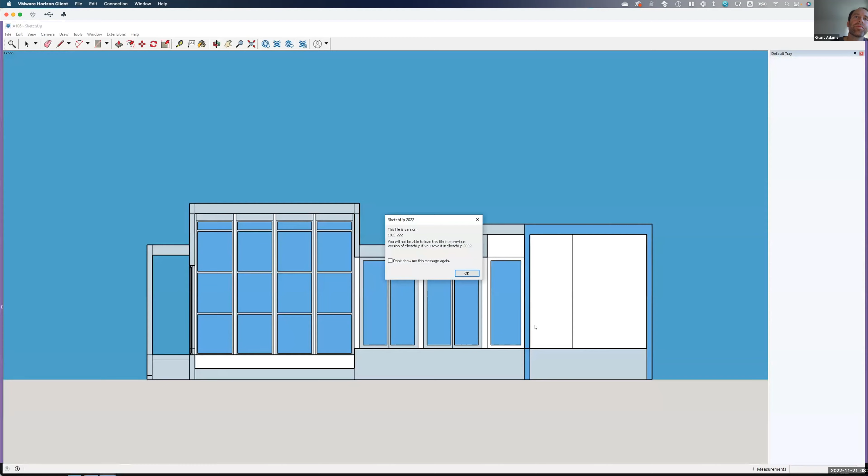Perfect. Let me switch into a perspective view so we can see my drawing, or my model. So this is the model. You guys have seen this house before. This was the one I brought in and worked on last class.

What we want to do is set up an elevation view. You're only doing one today, but the key is that even if we align it like this, you can see it's still in perspective—we can still see that little diagonal line. It's not really an elevation view, nor is this view an elevation view.

In order to get an elevation view, we need to switch out of perspective. The easiest strategy is to go up to the camera menu, go to standard views, and start with one of the side views. Let's look at the front, for example. Well, that's not the one I want.

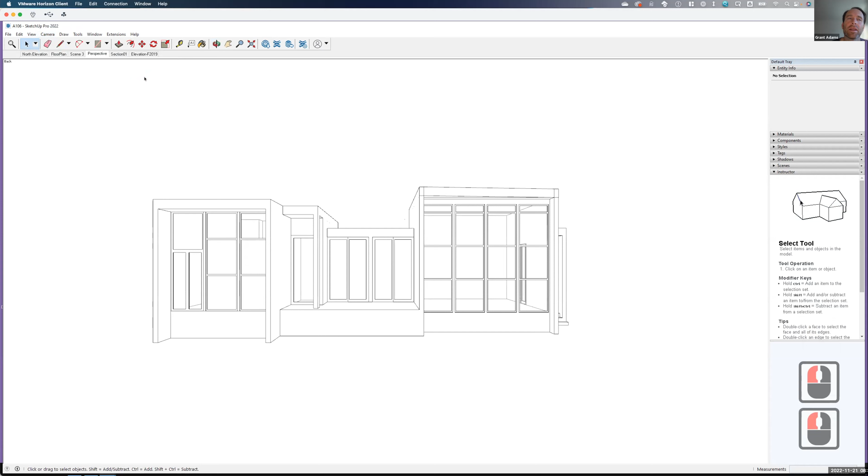So let's go back to standard views. Let's go to the back. Looks like that's how I have it oriented. So that's good, but it's still in that perspective.

Now let's go up to the camera, and instead of choosing perspective, we're going to choose parallel projection. When we do that, we see that the perspective goes away, and that's what we want. This is fundamentally an elevation view.

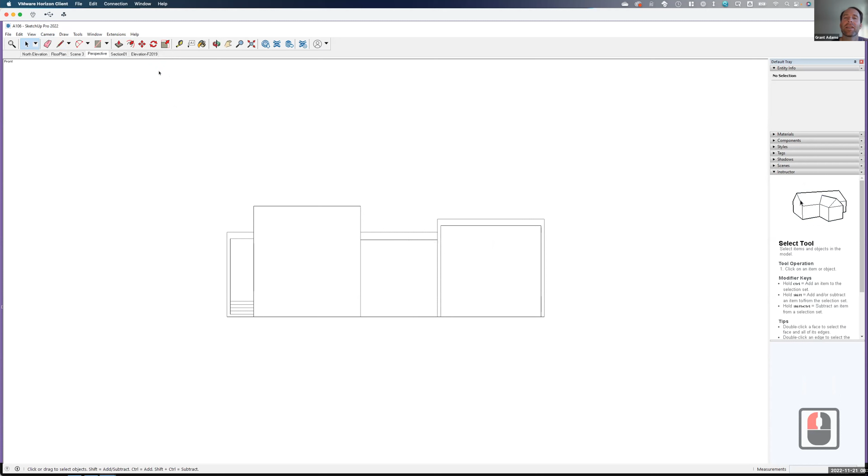Now, do I have other elevation views? Absolutely. Are they complete? No. If I went, for example, to the front view, that's less than exciting. Could I work with this? Sure, if I had to, but I don't want to.

So pick the view that looks best to you. For me, it happens to be the back view—that's the most complete, and that's the one I'm going to work with. If you're working through this, do something similar: pick the view that's most complete.

Then I'm going to zoom in on the view a little bit, just so we can see more of the elevation. So maybe right about like that.

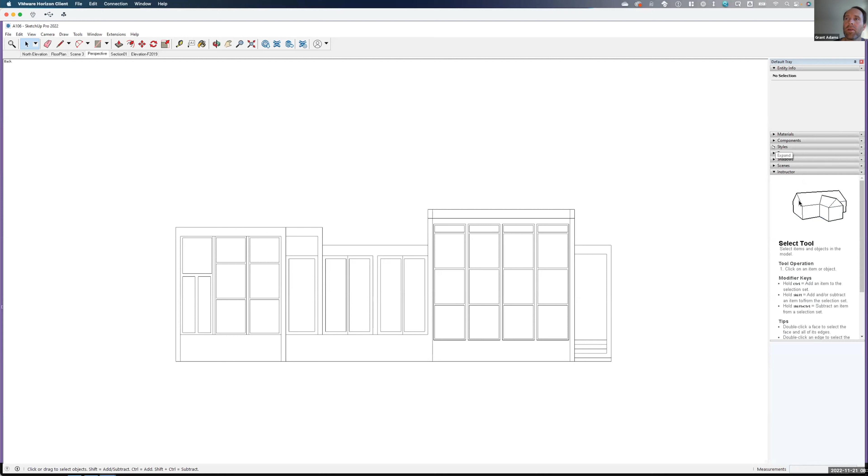Now that I have the view showing here, it's nice to be able to save this so I can come back to it later. We do this in Rhino all the time—oops, sorry, wrong tray here—but we're going to do this in SketchUp as well.

I'm going to expand the little tray for scenes. If you don't have this tray showing up, go into Window, and under Default Tray, make sure Scenes is checked so you can get it if it's missing.

I already have a bunch of saved scenes here, but this is a new saved scene. I'm going to click the plus sign right here, and it's going to add a scene. It's called Scene 7 right now.

I'm going to go ahead and rename that scene. Let me scroll down here a little bit. Usually it gives me some properties. Go ahead and double click on it to see if I can rename it—you right click, rename scene. There we go. I'm going to call this Fall of 2022, and we'll call this Elevation.

Oops. There we go. And so that's going to save my scene.

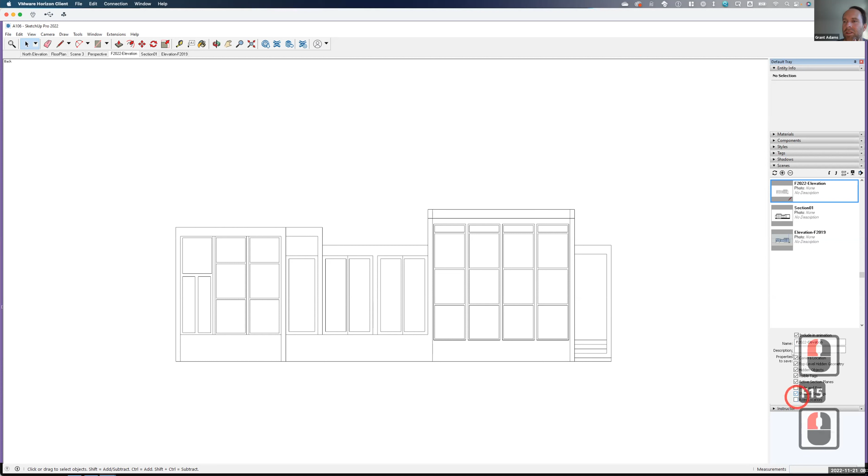Notice it says properties to save: camera location, top level, hidden geometry, hidden objects, blah blah blah. The only thing we don't really care about saving is the style, because we're going to be modifying that. We can also uncheck the axes location because we don't need those saved. Okay, so that now has that.

The advantage here is that if I were to go back to a perspective view, for example, and orbit around my object to look at it, I can come back to that fall elevation just by double clicking on it, and it's going to drop me right back into that view.

And this is good because if we make a change, we can go back and repeat the process and fix it and get this view again. So now that I have this view set up, it's a matter of exporting this into a place where we can do some collage work on it. We're going to be doing our primary collage work today in Photoshop.

So all I need to do is export JPEGs of this. This is just the basic lines drawing. I'm going to start by exporting this one. I'll go to File and then Export, and we'll choose 2D Graphic. So File, Export, 2D Graphic.

We're going to save it as a JPEG image, but I want to make sure it goes on my OneDrive here.

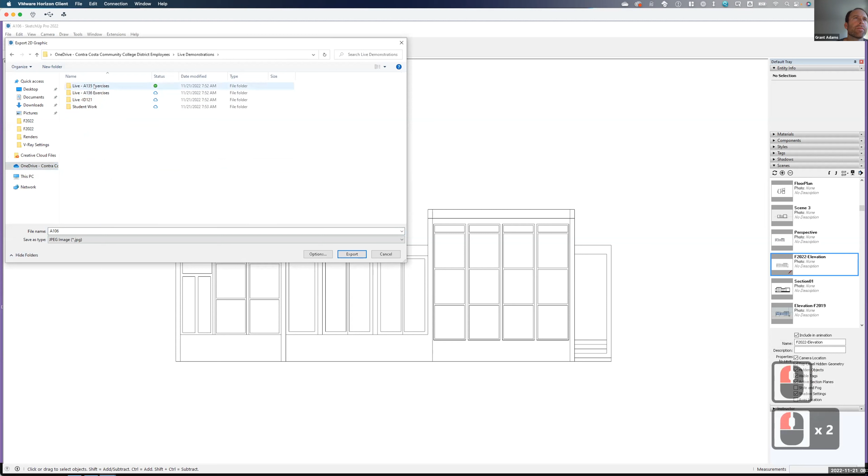When you're creating the scene, is it getting updated live or is it a snapshot? So if I were to make a change to the model and go back to that scene, it will show the updated change. So all that we're saving is the view itself. I could add something on top of my building and it would just come back to this view and reflect it. So it's not static in time, the view is just the saved part. Did that help clarify? Yeah, that's what I wanted to know.

Okay, so I'm going to call this A106, and I'm going to call it elevation, and dash lines. This is again for my own organizational strategy. And I'm going to look at the options here before I click on export.

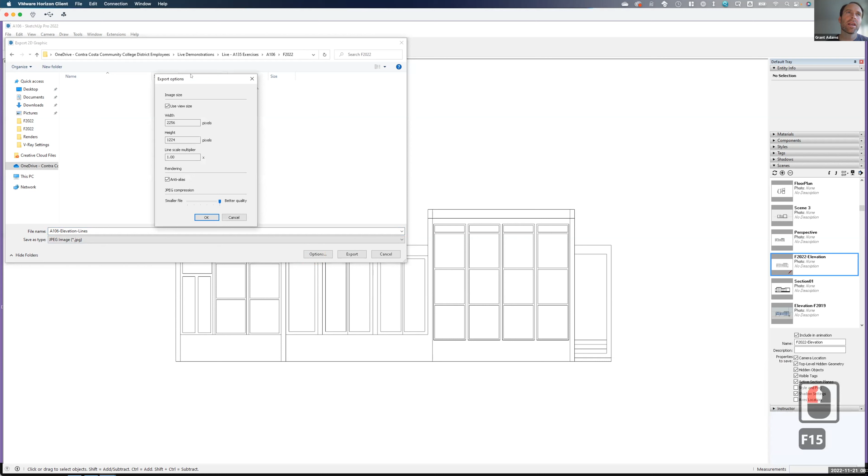This is actually really important because by default it's going to export the view size, which is only about 1,000 pixels tall, 2,000 pixels wide — really, really small. If you want to create this on a poster or something that's going to go up on the wall, you want to think about what size this should be based on how big it's going to end up being.

For example, if you wanted the width to be 10 inches on the wall — like an 8.5 by 11 piece of paper, but using 10 inches because it's a round number — we'd print it out at 300 pixels per inch, or 300 dots per inch. So we'd be looking at about 3,000 pixels in width for 10 inches. If we wanted it at 20 inches at 300 pixels per inch, we'd be up in the 6,000 range.

So when doing these exports, you want to think about how big you might want to make it. I'm going to call it 6,000 for right now. I'll uncheck the view size and change this to 6,000, and you see the height also updates. So we're having it at 6,000, and we're going to use our better quality, all the way to the slider.

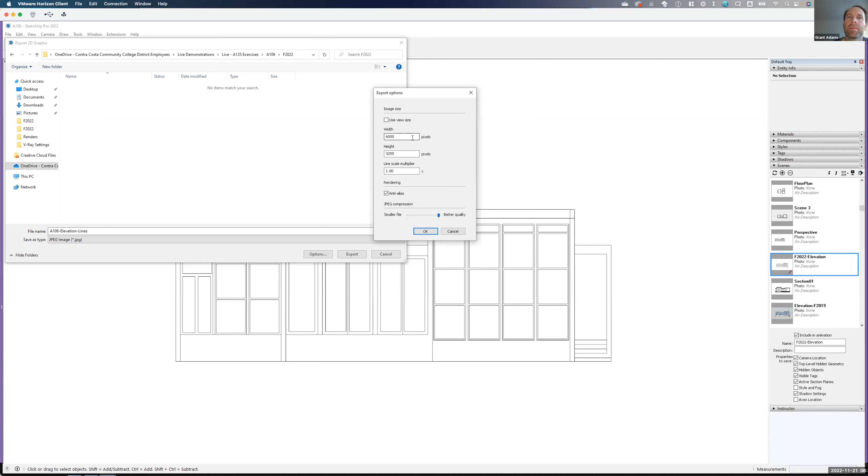The max you can put in here, I believe, is 10,000 or 9,999 — I think that's the max SketchUp will export. So I'm going to use 6,000 for right now, that's enough, and we'll go ahead and say okay, and then click export. And that exports just my basic lines version.

Now some of you have probably experimented enough with SketchUp to note that there are different styles available for us as well. The line version I'm showing is the hidden line style. You may not have been in this style — you may have been looking at something different to start with. There's nothing wrong with that, or one of these other styles, but we wanted to get it into the lines-only version. So I go to the default styles and choose the hidden line style, and that's just our white lines.

Likewise, if we go into our — I think it's under assorted styles. No.

You could go into straight lines here and use one of those. I don't like those as much. I really like the hidden line style. I think that's the best one. But once I'm on that, I want to make sure I turn off all these extra lines.

So I'd go into view and I'd turn off the axes, the guides, so that I end up with just this line. That was the original export, and I should have gone through the process of getting it set up that way. Now, sometimes you do actually like the colored version.

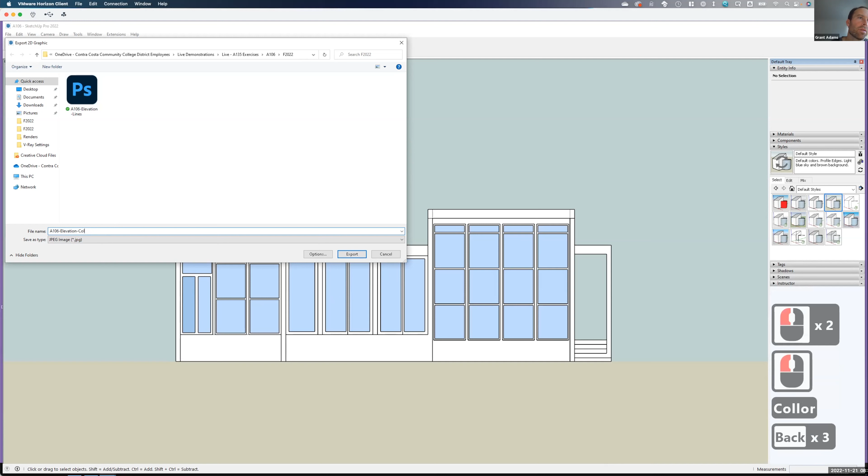Under our options here, we're going to make sure it's still set at 6,000, which it is. And then we'll go ahead and export it. It's important that we haven't moved the scene at all, so we're getting the exact same view exported and the pixels match up. So we're still at 6,000.

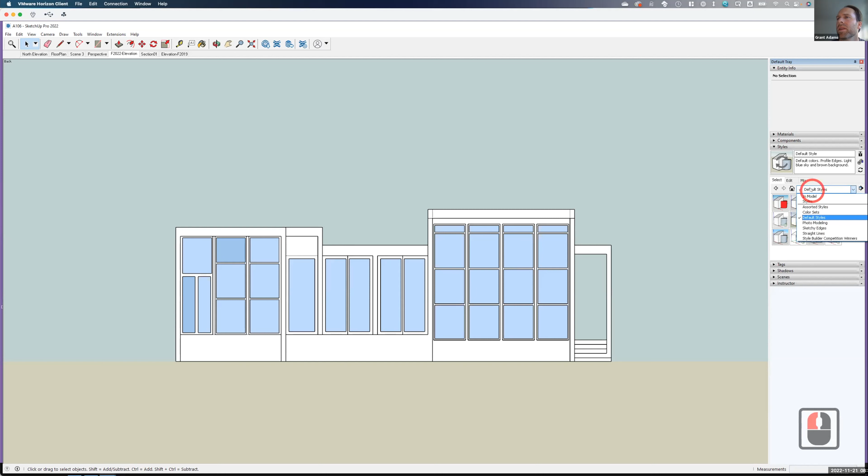Okay, so let's look at some of the other styles. I'm going to go back to that hidden line style. And this time I'm going to turn on the shadows. So I've gone to hidden lines and I'm going to go up to view and I'm going to turn on shadows. And then over here in the shadow section, I'm going to swing the time of day and time of year until I get a shadow.

Now, in this scenario, I don't get the best shadows because I'm on the face of the building. That's not going to give me the best shadows, but maybe something like that might give me a little bit. There we go. Now I'm starting to get a shadow on the building. So maybe somewhere in there.

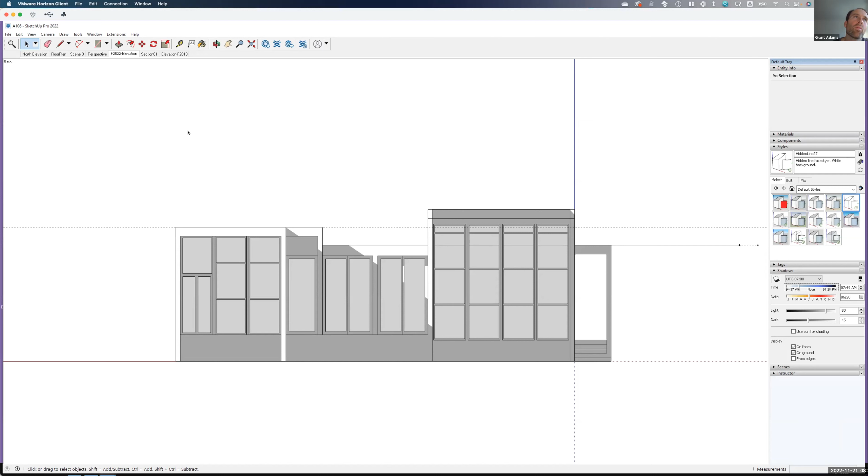Obviously, you can pick a day and a time. Let's do that. Okay. You can pick a date and a particular time, and that's going to create the shadow for you. Once again, I'm going to go to, yep.

Did you geolocate this? I did not geolocate this. So we can geolocate it. For the scope of what we're doing in this class, we don't need to. If we did, we'd go to File, Geolocation, and Add Location, and it would then give us our bit of terrain, and we could set this on that piece of terrain.

So if you want to do that, this is assuming just a generic date and time. But if you wanted to do it, I can certainly help you walk through that part of the process. Okay, we can do that during check-in. But it's a little bit beyond the scope of what we need to do right now.

All right, so now that I have the shadows here, what I don't want to see is all of my building lines. So I'm going to go back into my styles here, and I'm going to go to Edit. And when I'm in Edit, I can actually turn off the edges. It's right there under Edit, it's the first little edge settings, and I can uncheck the edges, and that gives me just the shadows.

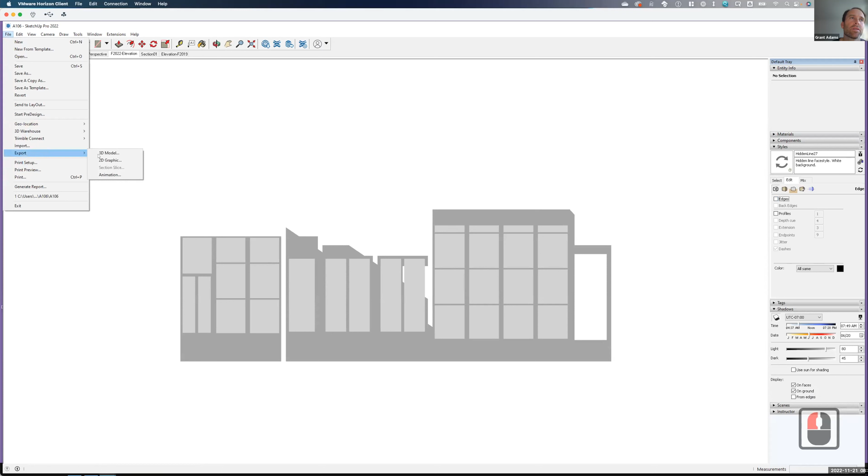And this is a very powerful export to have because it's only the shadows in my building. I can then go back to File and then Export 2D Graphic. And so this one would be called Shadows. And then we'll go ahead and export it.

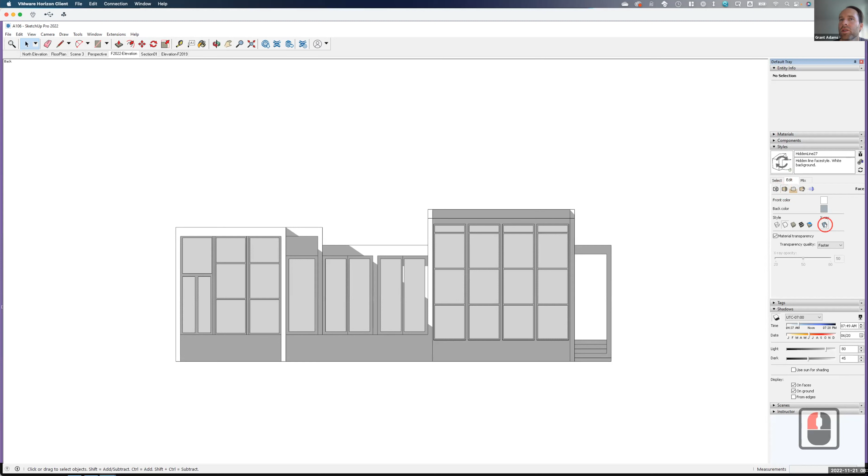Let's turn those edges back on. We can also come over here into our face settings, and we could choose to do an X-ray mode. You can see a little bit of my door in the X-ray mode. The truth is that in this view, there's not a whole lot to see in X-ray mode. So it is one of the options, one of the things that I mentioned in the tutorial that I walked through. But I don't think in my case, X-ray gives me anything. So I'm not going to end up doing the X-ray mode.

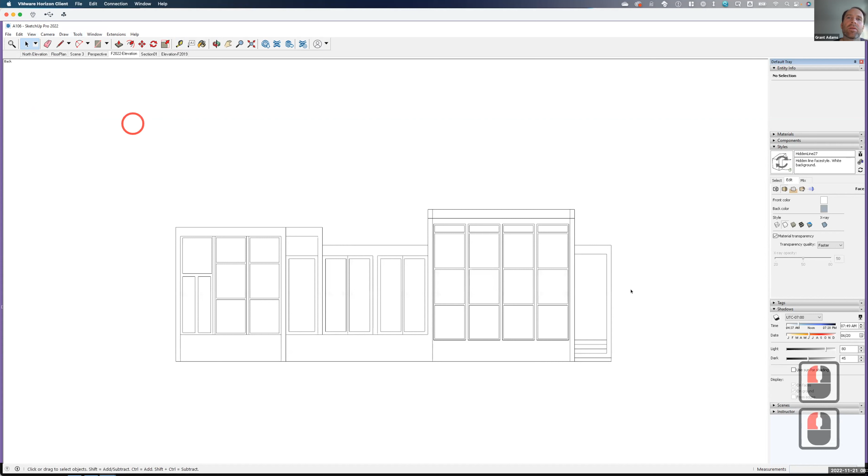Let's go ahead and turn back off those shadows. I'm going to go into my view, and I'm going to uncheck shadows. And then let's look at some of the other styles. So we worked with that hidden line style. There are some other ones like these sketchy edges that can sometimes provide a nice kind of look.

Sometimes they're a little bit too much. Let's see if we can do it. Something like that is probably a little bit too much. They have different dry erase markers and whatever. I've actually found a lot of luck in the past with this airbrush with endpoints. It doesn't look the best here, but in the export, it sometimes looks really, really nice.

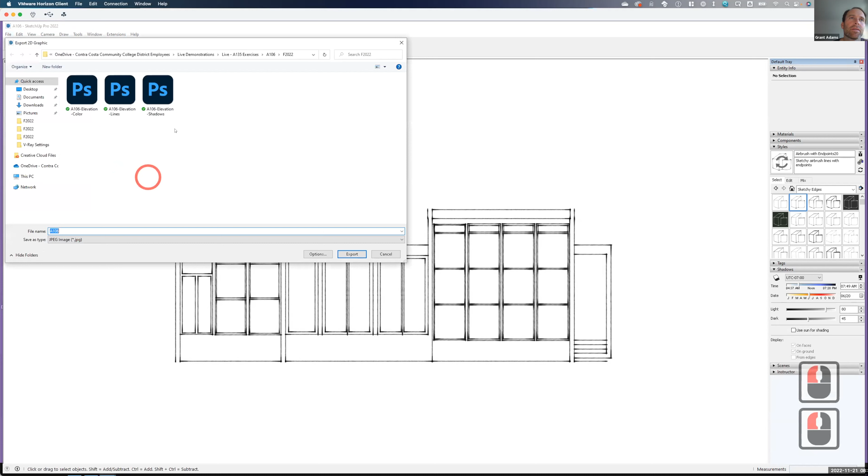So I'm going to go ahead and click on that airbrush with endpoints. And once again, I'll go up to View, and I'm going to turn off the section planes, the section cuts, the section fill, and the guides. So I have just the airbrush with the endpoints. And from here, I'll go ahead and export it again. So I'll go to File and then Export 2D Graphic. And we'll call this one Airbrush. And we'll go ahead and export that.

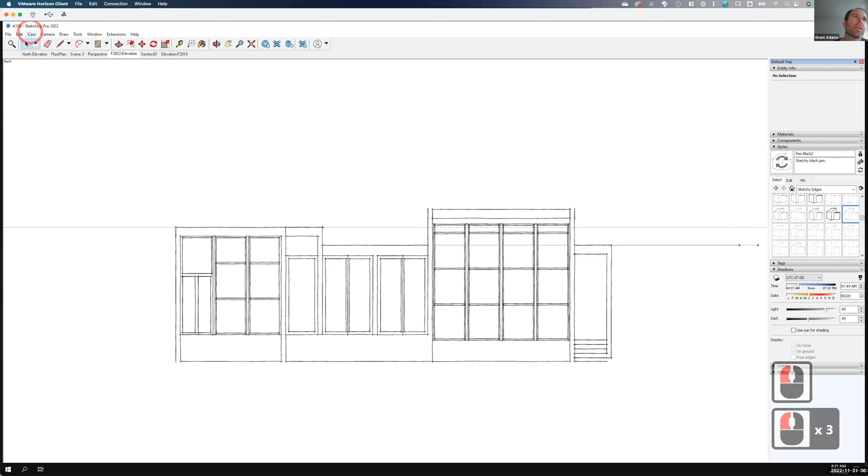And the last one that I've had good success with is the pen gray, which is this one. It's a little bit lighter. There is a pen black, I think. There's pen black. It's just a little bit darker. I like the pen gray, but again, it's just a matter of preference. I'm going to go ahead and go to View, and then we're going to uncheck the section planes, the section cuts, the section fills, and the guides.

And this is a little bit more casual, and we'll go ahead and go to File and then Export 2D Graphic. If you want to experiment with any of the other options, this is the pen, you can absolutely export any of the other options here. So if you liked, for example, let's see here, they have some of these.

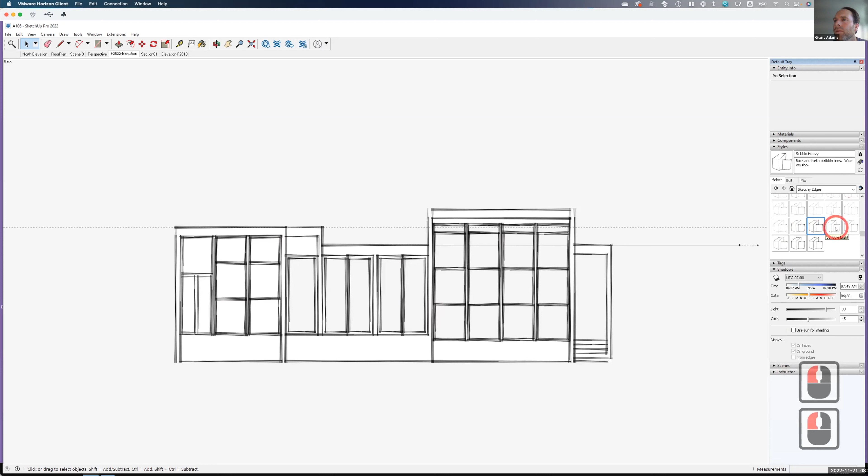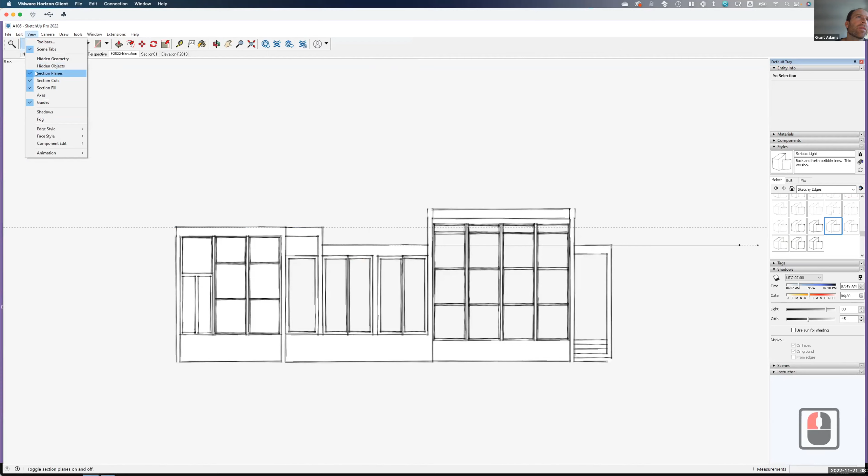Let's say you like that. We could export this as well. I'll go to File and then Export and then 2D Graphic. And this one was called Scribble. So I set up the pen, the airbrush, the shadows, the basic lines. I set all of those up for you to do some of the export. Oh, before I did that, I should have turned off the section planes, section cuts, and the guides. Let's do that export again.

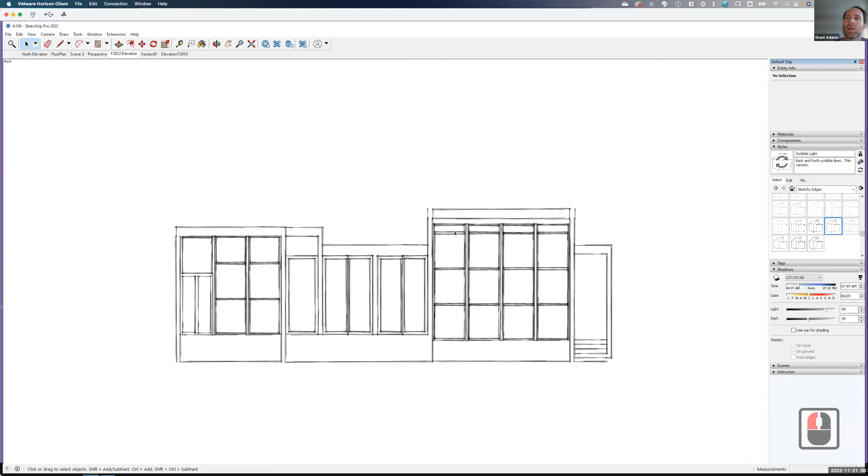So I've set up those 4 as kind of the base that you need. But if you want to go in and do more, there's no harm in doing more of these exports because you can layer them up and see what it looks like for you when you start to put them together in Photoshop. So I've done the exports. Now let's jump over into Photoshop and start to collage these pieces together. So I'm going to go up to the Adobe folder here, and we'll open up Photoshop 2022.

And one of the important things to consider when we're looking at this is that this is not a scale drawing. This is a representation of what one of our elevations would look like. If we wanted it to be a scale drawing, we'd have to do some scaling of it when we went to print it, say in InDesign. So this is a little bit different than when we took AutoCAD into Illustrator and we did the collage work. There we were preserving scale. Here we're just creating an image of our elevation view.

So I'm going to go ahead and open the first one. So I'll go to Open. And let's go into my folder here. That was not the correct folder. Sorry about that. All right. And so here were all of mine. I'm going to go ahead and click on the elevation lines, and we'll go ahead and open that. And there's that base lines layer. So this is currently a background layer.

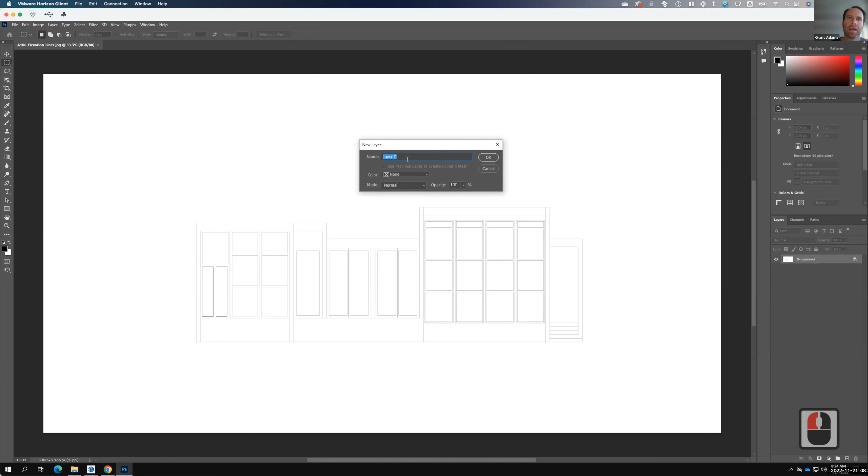Remember, in Photoshop, when we open a file, it always comes in as a locked layer. I'm going to go ahead and right click on it and say layer from background. There we go. And we'll call this lines. I'll say OK. Then I'm going to bring in all the rest of the elevation views. And I'll do that by going to File and then Place. And we'll use Place Embedded for this. And we'll pick the next one.

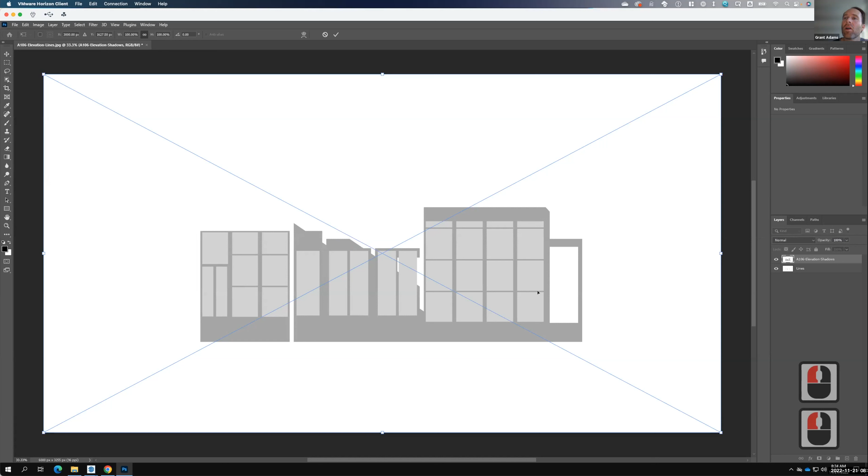So there's the lines. Let's do the shadows. And I'll place. And the advantage here is that they all line up when I bring them in. That's why the export process was so important. Let's bring in the next one. I'll go to File and then Place Embedded. And there it is. We'll confirm. And then we'll go to File and then Place Embedded. And we'll drop the color one in. We'll confirm. We'll go to File, Place Embedded.

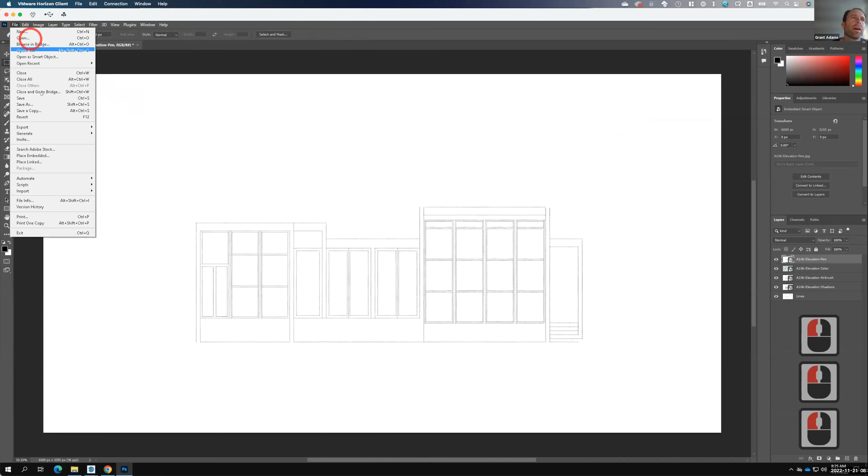We did the pen. Oh no, we need the pen. There we go. And we'll go to File, Place Embedded. And the last one was that scribble. And we'll confirm. Notice that the lines do look a little bit different in Photoshop than they do in SketchUp.

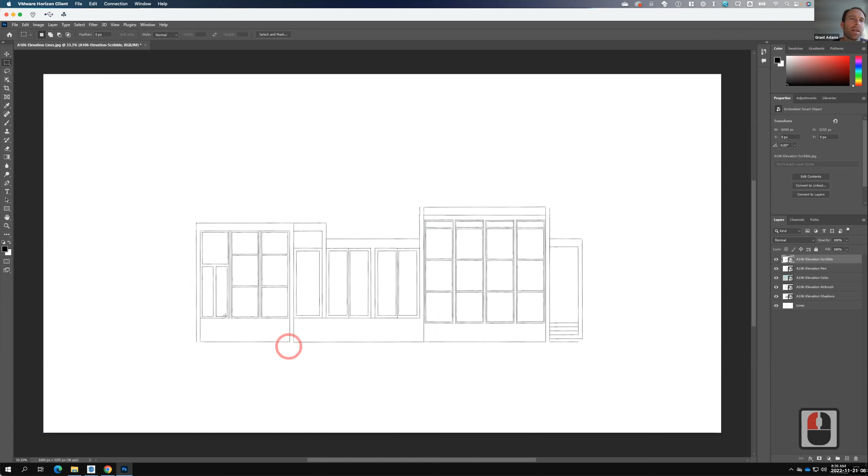This was the scribble in SketchUp. And then when we jump over into Photoshop, it looks slightly different. Now, if we were to zoom in, we can see that there still are some scribbles to it, but it's not quite the same. So I have all of those put in. And if you remember back, we had a strategy for how these things start to layer up.

So what I would do is I would take this elevation shadows and I would switch the blending mode. This is way back to 105. It's all coming full circle. And I would use the multiply blending mode. I can find it right there. And that's going to make this shadows transparent such that we can see our lines behind.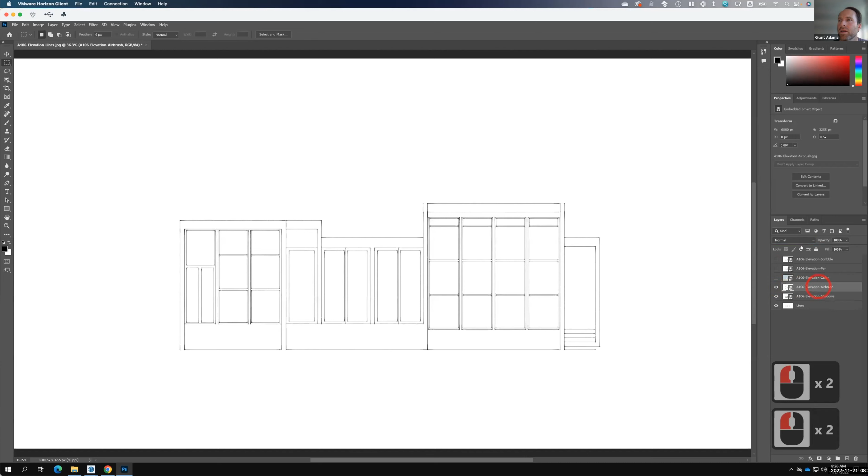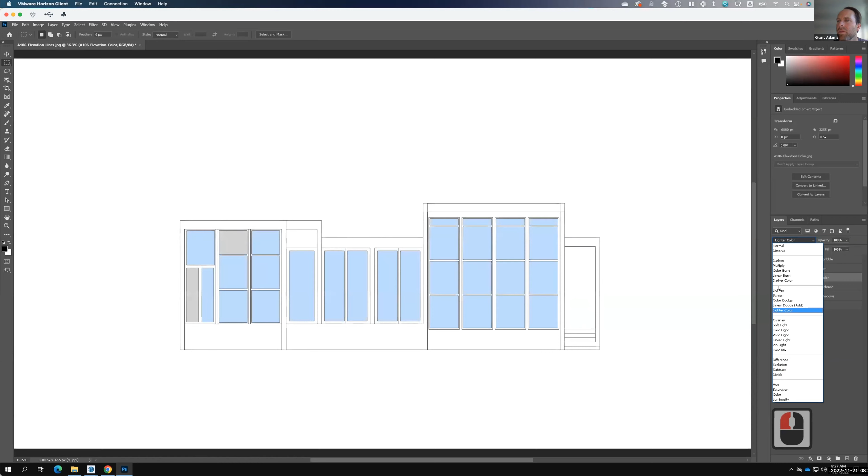Then we could turn on the airbrush and we will again switch the blending mode into multiply, if I can see it. There it is right there. Then we could turn on the color and we could switch the color to multiply as well. The color I'm not going to end up leaving on. Really, the color is just about selections, but we can go ahead and switch it to multiply just so we can see through it right now. And then I'll go ahead and turn it off.

Let me turn on the pen and we'll switch that one into multiply. There we go. And then this last one, which is scribble, we'll go ahead and turn that one into multiply as well. So our end result here in Photoshop looks a lot different than what we could have gotten out of SketchUp just by layering these up. There's a certain depth and density to it that we wouldn't otherwise have, which I think ends up being nice.

The other thing is we have the ability to adjust. If the shadows are too dark right now, we can easily change the opacity down on those shadows and make them lighter if we want more of our building to appear. So we've got a lot of flexibility in terms of how these start to come together and make our final building elevation. So now we've got our building elevation in here.

We need to concentrate on creating some ground. And this is kind of a critical component to a building elevation, is we need to know where that ground would be. So I'm going to create that ground on a new layer. So I'm going to go ahead and click on layer right here, and I'm going to rename that layer to be ground.

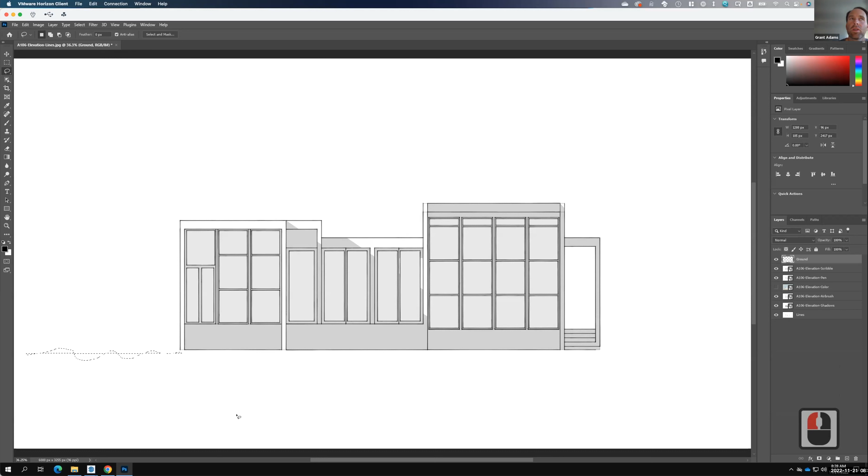And so to start to establish that ground, I'm going to make a selection, and I'll use this lasso tool to make the selection. The advantage of the lasso tool is I have the flexibility to actually draw what the ground would look like. So I'm going to go ahead and do that along the length of my drawing. I want to make sure, I'm going to press Control minus, that I can see the edges of my page. And then I'm going to start to draw what the ground should look like. So we'll go right about like that.

If you feel like you're running out of space with your mouse, you can always come back and go around, and then that'll enclose that area. Then you can come back and add by holding down the Shift key. You can keep going with a new selection.

I was just curious with the multiply command. Does that actually just sort of make each scene one block sort of? So what the multiply command is, it's the blending mode on that layer. So it's controlling how the transparency occurs on that layer. And what the multiply blending mode does is it makes things that are white transparent, and it makes things that are dark darker. So it lets the darker shine through.

And so in our exports, the background was always white. So using the multiply basically makes the background, the white, become transparent so we can see through it to the layer below. Oh, okay. Thanks. No problem. I'm going to go ahead and hold down Shift. Yep. It makes the dark darker, but there wasn't anything other than that layer that brought in the darkness. I don't understand. Yes.

So what it does, yes, it makes the darks darker if we were looking at a photograph. But when we're looking at this, the only thing that we have that's dark are the lines and the shadows themselves. So those are all darker than what is white. Therefore, those show up through the transparency.

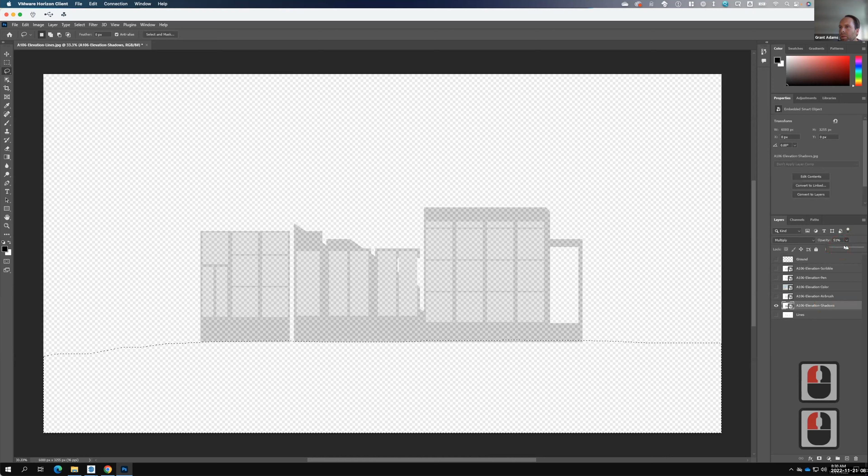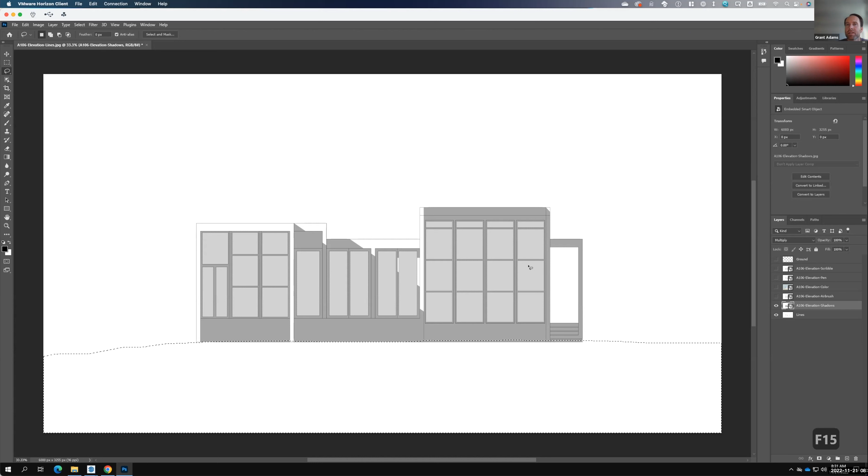And it might be easier to see if I turned this back to the opacity, right? So there we are with our opacity at 100%. When it switches to multiply, the white areas become transparent and the black shadows show through. So there it is with the lines on it. Okay, so the shadows become darker in a photograph, but in this they just appear. They just appear, exactly. Because this is a line drawing that we've created versus a photograph.

Okay. And so the colored version here may be a good example as well, because we're seeing the color in the multiply, but any area in this, let me turn these off for just a second, any area that's white stays transparent. So the colors are now appearing in the background when I turn this one on, oops, wrong one, sorry, but the white areas are staying transparent. Not that it really matters because they're white, but that's the idea of the blending mode.

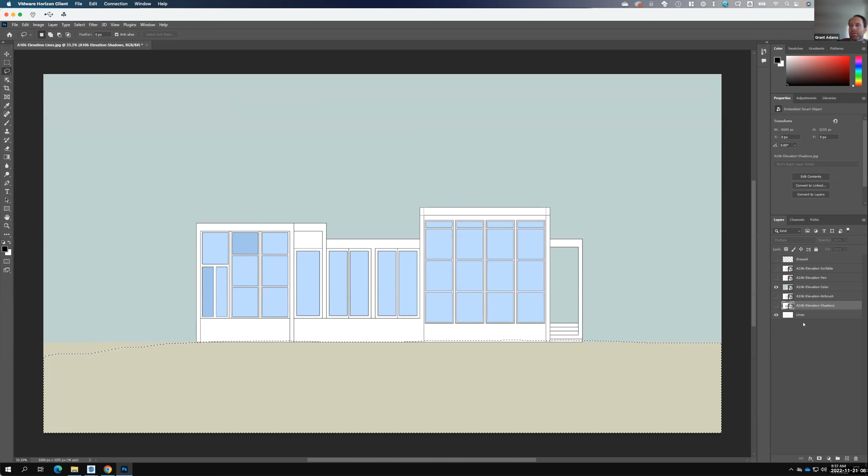It saves us from having to cut out the shape. Oh, okay. That's the advantage. We could instead cut out the shape, but by switching to the multiply blending mode, we don't have to. Let me change those shadows down. They're too dark. So I'm dropping the shadows down so they're not quite so dark.

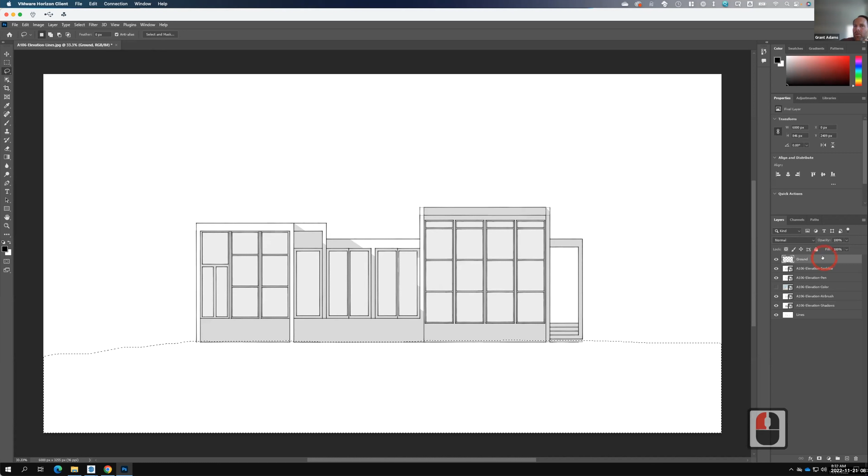Okay. So I went ahead with that regular lasso tool and I drew in the ground. And it looks like I missed the building just there a little bit. Let me go back to my lasso tool. I'm going to hold down Shift to add to the selection, and we'll come in here right like that. The key is that I want to make sure that I'm completely covering the bottom of the building.

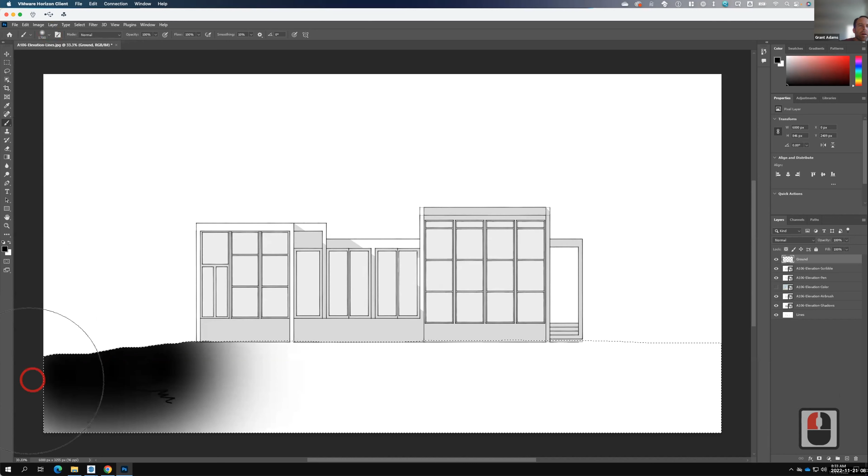Okay, so let me switch so that I'm on the ground layer, and then I'm going to actually paint using the paintbrush here with black. I'm going to paint in this area that I just made the selection. It would take me forever to paint like that, so I'll make my brush size bigger. I'm using the bracket key to make it nice and big. Alternatively, I could come up to the brushes and just slide the slider up. And again, the advantage of making it big is that I can fill this in rather quickly.

Perfect. So I've filled that in. That then gives me ground. This takes the place of that dark ground line that we were showing on the elevation view in AutoCAD. So we're giving us a nice ground. To me, this is still showing up a little bit plain. And so instead of leaving it like this, I'd love to add a little bit of grass on it. And I think that would look really nice.

I'm going to use the clone stamp tool. And we did this way back in exercise 107 or 8. I think it was 108. And I'm going to use the grass brush for this. It's not loaded by default, so we're going to load up the legacy brushes. There it is. And then we'll look under our legacy brushes, under the default brushes, and it's about halfway down. And there it is. There's my grass brush.

So again, I'm using the clone stamp and I'm using the grass brush. And when I pick that grass brush, I need to copy from. So I'm going to hold down the Alt key to choose where to copy from. Right there. And then when I go to create the grass, I'm going to add the grass right along that edge. This looks to be about the right length.

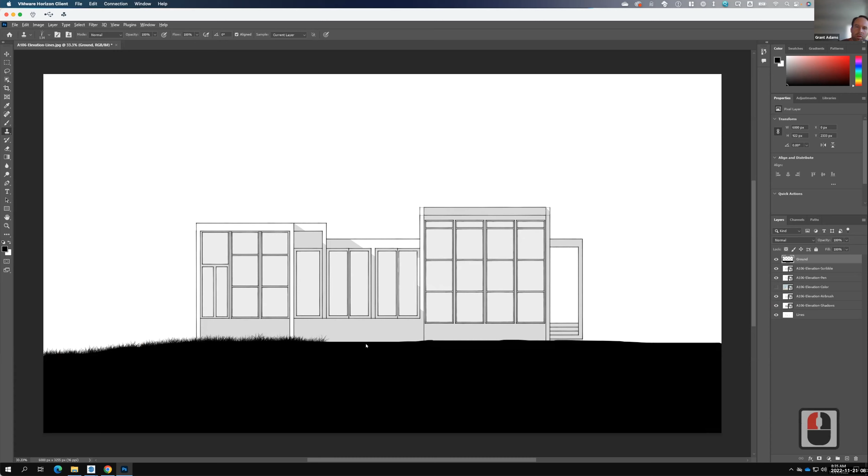All right, I'm going to press Control Plus to zoom in here. Oops, that was Option Plus, not Control Plus. I'll use Spacebar to pan. It helps if I actually hold down Spacebar. There we go. And then we'll keep cruising along here, and filling in that grass.

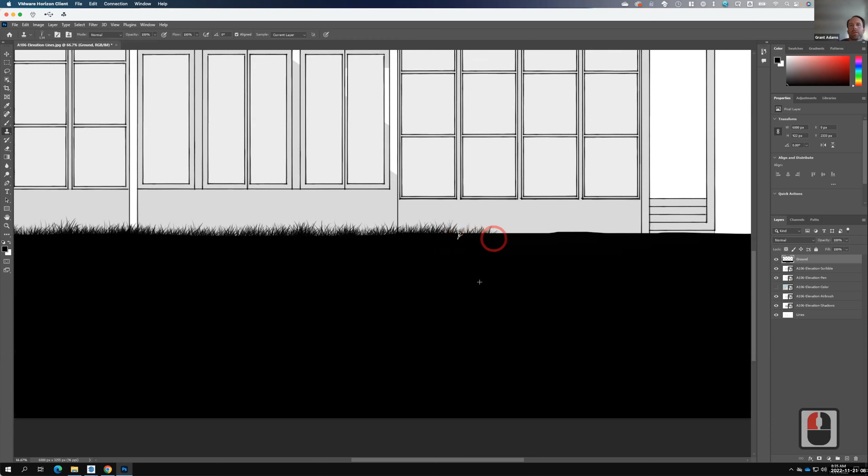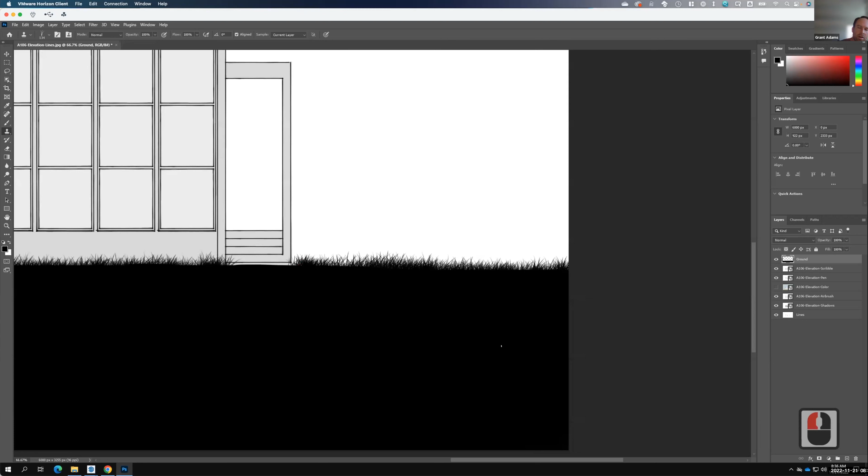I'm going to stop right there at the path, presuming that there would be a path there. And then I'll move myself over to the other side, and I'll pick up where I left off. All right. And now I have that grass. So if we look at it as a whole, I'll press Control 0. There we go.

Instead of having this sit just floating in space or having a dark line below it, what I've done is I've added some ground to give it context. And you can already see this starts to live. It starts to ground this building and give it the context of a particular scene. So I've added that little piece in.

Now, if you really don't like the black, we can make modifications to that. We can put an adjustment layer on the ground. With a levels adjustment, we can skew it to be like a gray or a white or whatever. So I'll show you some options a little bit later on if the black is too stark for you. There's no harm in fixing that.

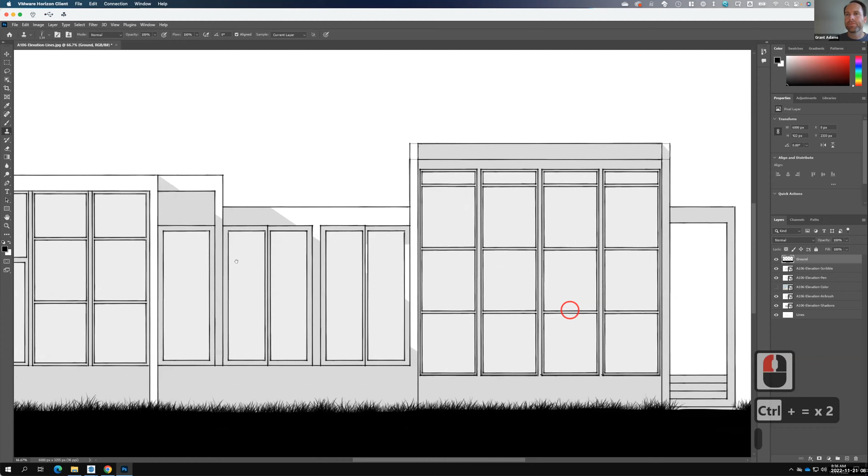The other thing that you might find, if I zoom in here, is that maybe that path should be a little bit more straight where I'm walking in. So we could use a rectangle here and fill that in so that it became a little bit more path-like. Let me use the paintbrush here and we can just fill that in like that, as if it were a path that somebody was walking on. Let me press Control-0 to zoom out, and there we are.

So thus far, I have my elevation, I have my ground. Now let's start thinking about how we could collage in some context for this. This is always kind of like when we were in Illustrator after AutoCAD, we're deciding how much is too much, how much is enough, what do we want it to look like, what shows well. So I'm going to start with a background, and the first thing I need to do is find a background image.

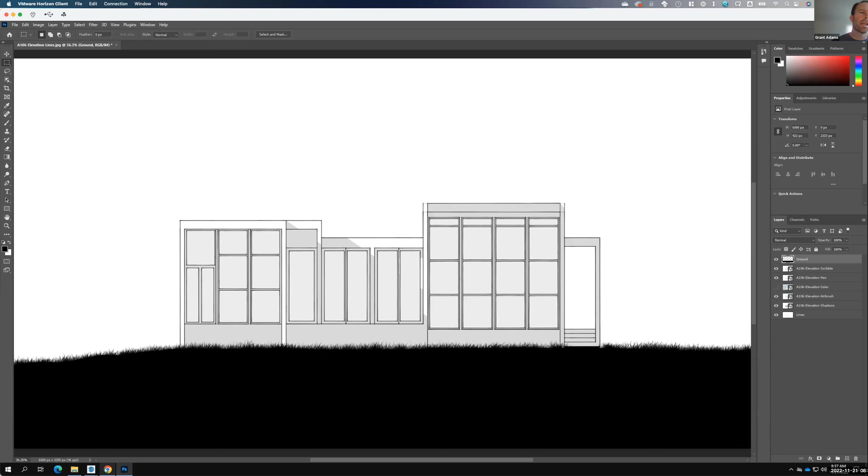I'm going to click on the new tab here, and we'll go to Google Images. Actually, I'm going to do a Creative Commons search. So let's search.creativecommons.org. There we go. I'm going to look up Yosemite Meadow. Perfect. Any one of these images might work really nicely to give me some background context. This one, for example, that's a little bit low. Maybe this one. Yeah, I like this one.

Let's see if we can get the image. Perfect. Let's go ahead and download that. I'll click the little download icon, and I want to download it in its original size. Ooh, that's not a very good resolution. Remember, we were at 6,000, so 1,600 isn't very good. I might go back and see if we can find a better one. Yeah, that's better. And we'll download this.

Obviously, if we were going to the site to do a site visit, we'd have our own picture of exactly what the site would look like. So sometimes you take potluck here, and we're going based on what we can find. That one might be okay. I'm not overly concerned with sunlight settings because we're not trying to match up my particular scene. So any one of these would work out okay. We'll try that one that I just downloaded.

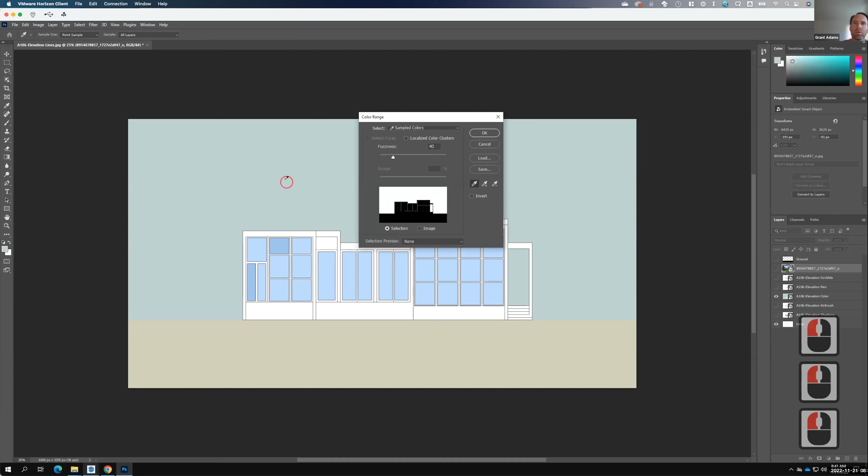So we need to mask off where our building would be. So to create that mask, I'm going to go all the way back to my original layer right here. Sometimes people like to use the color version here because this can really help, because you could do a color selection. So I could go to Select and then Color Range, and I could choose everything that is in this blue color really easily. So that's just a strategy.

I'm going to go ahead and select that, but I'm also going to select down here. So I'm going to use the magic wand tool right here. I'm going to hold down Shift and select that as, whoops, I need to be on the color. There we go. So now I've selected that. So I made sure that the transparent parts were selected and the background selected.

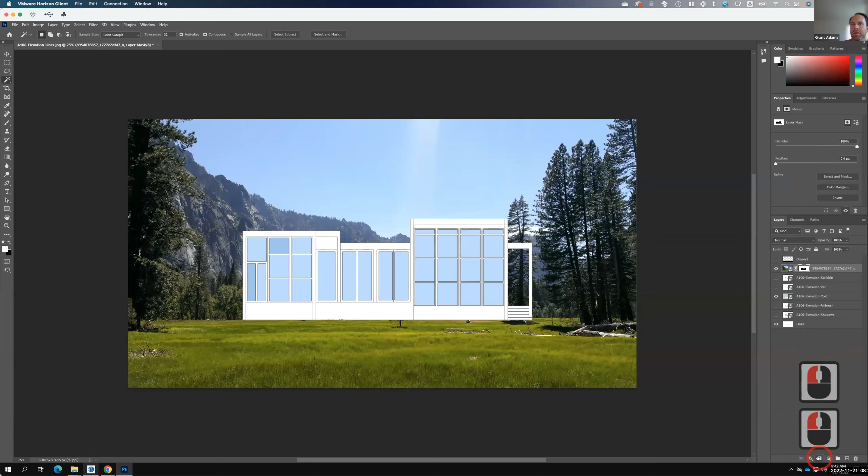Then I can come up onto my photograph right here, and I can click on the add layer mask. And that's going to cut out for my building. We turn back off the color, turn back on the ground, and we can turn on the rest of these like that. And now we're starting to see my building in its context.

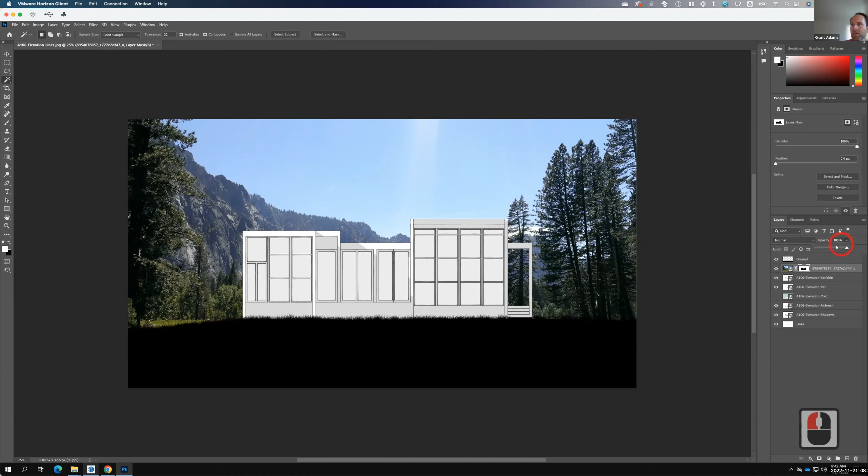This context is still a little bit stark for me, so I might do some modifications to it. One, I might adjust the opacity down to let my drawing read some more. Maybe I'll convert this background image into black and white. Maybe that would look better. So this is, again, an example where in Photoshop, you try things to see what looks right. So I'm going to go ahead and add an adjustment layer. I'm going to go up to Layer, New Adjustment Layer, and I'm going to do a Channel Mixer.

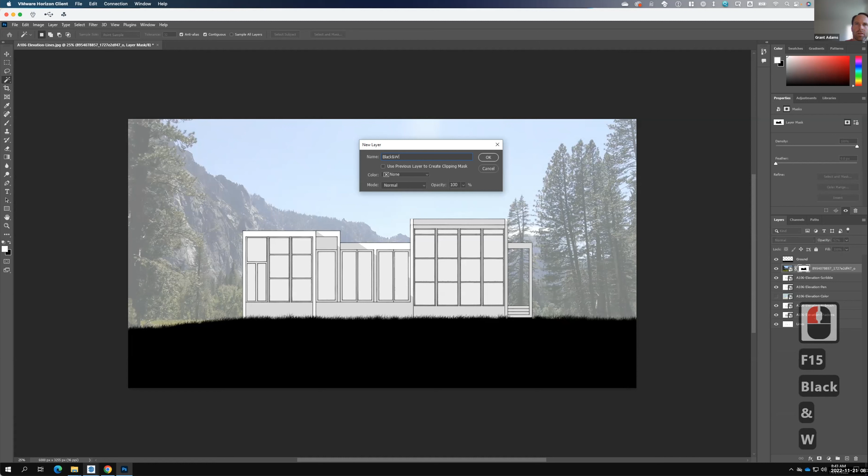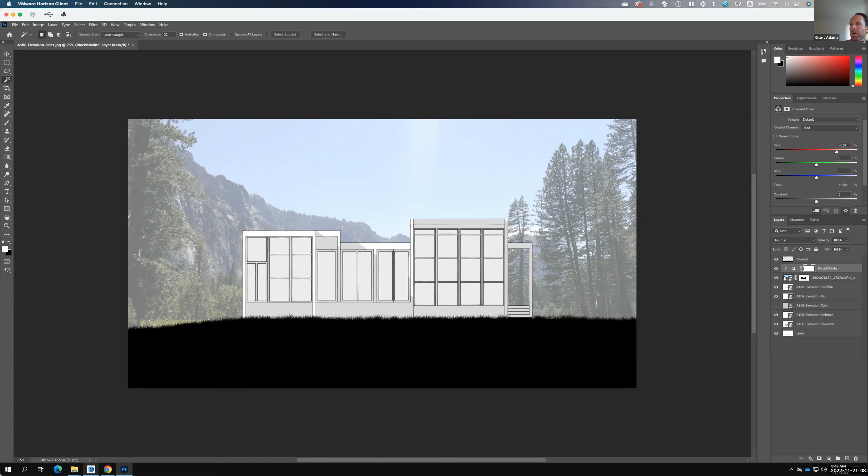We'll call this black and white. There we go. I'll go ahead and say okay. And I want this to apply just to the layer directly below it. And I'll do that by pressing Control-Alt-G or going to Layer, Create Clipping Mask. And now my changes on the black and white layer will only apply to my background image. So let's go ahead and adjust that.

Remember, we can do that by checking this little monochrome, and then we can go through what our custom presets would be. So we could try the infrared, we could try the red filter, the blue filter, etc., until you find what looks right. So again, this is just another example where I'm trying that background and deciding whether I like it in color or whether I like it in black and white.

Maybe the opacity is still a little bit strong. Maybe it needs to be a little bit less. The key here is that we want our building to be the part that really shines through. So maybe it's about like that. So you can see we're starting to build this up, we're starting to show our building. And maybe at this point, even my shadows should be a little bit stronger. And again, this is our strategy where we're tweaking and we're working through it.

So maybe I want to show all of my windows in blue. So let's go ahead and use our lines layer right here. And I'm going to go ahead and use the magic wand tool to select all of my windows. I'm going to hold down Shift and select my windows.

Daddy, right like that. Daddy. You guys, hold on one second. Sorry, guys, this is Thanksgiving break when my children are at home, so I need to take just a quick second and corral a few things. Give me a couple minutes and I'll be right back.

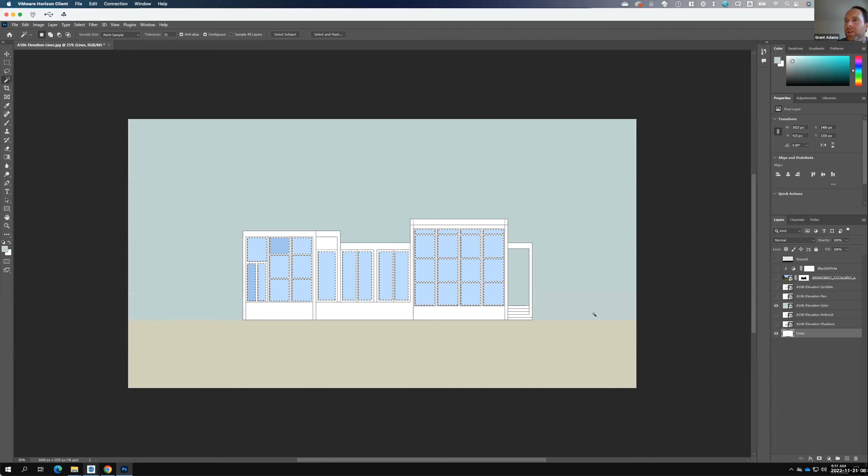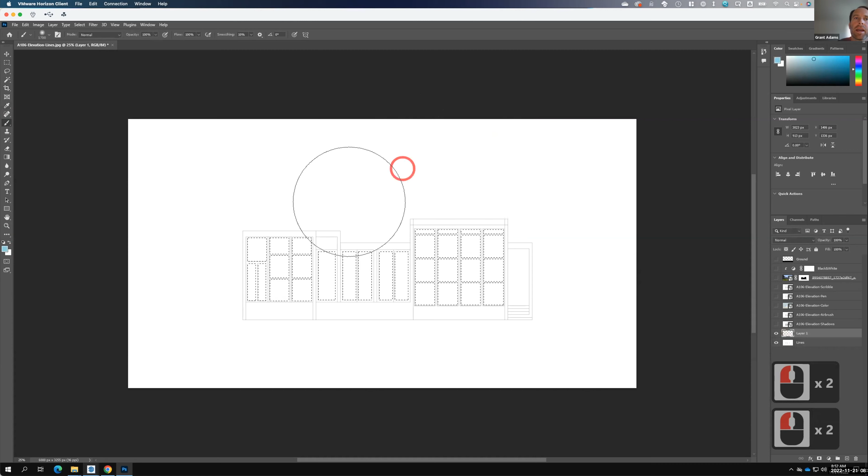Now we're going to work on these to actually fill them in. So I could do a new layer right here, and I could choose to paint with some kind of a light blue, maybe like that, and paint all of those windows in, for example.

And so now if we were to turn back on the ground and the background, let's make it black and white. We turn the rest of these on except for the color, and then we could start to see those windows.

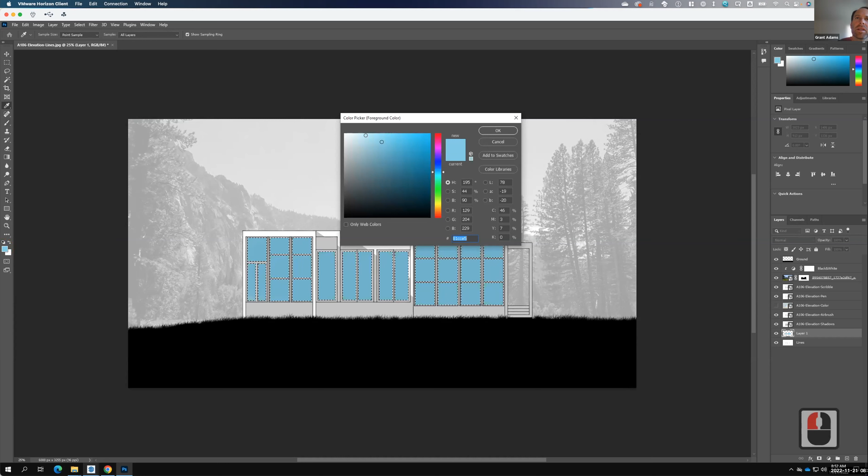For me, that's still not the right tone of blue, that's for sure. It's definitely turning out to be too dark. Let's go a little bit lighter, and we could paint those in like that if we wanted to.

I think it would probably look a little bit better if we used an image as a background instead. So let's go find an image of a sky. Let's come right here and we can look for cloudy sky.

I don't like that one. Let's go back to sky. I have a bunch on my flash drive that I've already saved. It could be something as simple as something like this, which is kind of a deep blue. Let's go ahead and get that image.

And let's download it in its full resolution. There it is, let's go ahead and show it. I'm going to copy it, and we'll put it into our folder for today, and we'll go ahead and paste it. There we go, and then we can bring that one in.

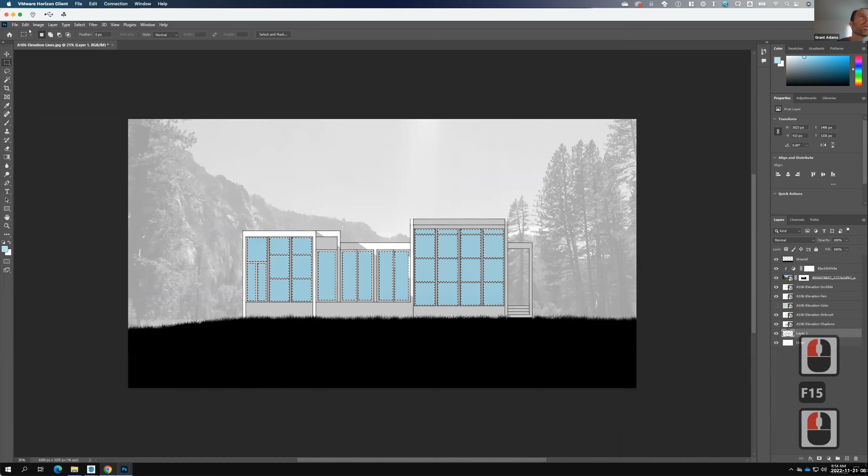So let me go to File and then Place, Embedded, and we'll pick that sky background right there. I need to make it bigger. Let's make sure we're covering it up there, and let's pull this up. Obviously, we don't want to see any of those buildings on the horizon, so we'll make sure that those are hidden. It's right about like that.

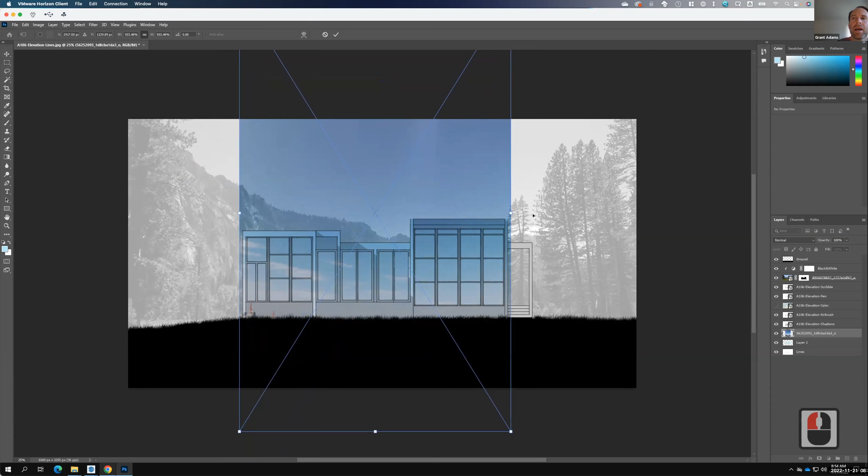And we can use that set of windows right here as a mask for this layer. So it might be easier actually to just go ahead and select all those windows again. I'll use my lines layer to do it. I'm going to hold down Shift and select all of these windows.

Right, like that, and then we'll be on this layer. Once again, we will click on select layer mask and it'll cut those out for their windows. So that's just another strategy. And again, we could take that and adjust the opacity down a little bit so that it's not overpowering, but it just gives a little bit of tint on what those windows might look like.

So again, all of these are optional. You can see we're starting to develop what looks good. Now, I told you earlier that there was a point at which I might try the ground as being white instead of as being black. Remember, we can do that by just adding an adjustment layer on top of the ground layer.

So let me go up to my layer, new adjustment layer, and I'm again going to use a levels adjustment here. And then I will tie it just to the ground, so it's Control-Alt-G, or layer, create clipping mask. There it is. And then with that levels layer, I'm actually going to change the color. Oh, come on, is it not working?

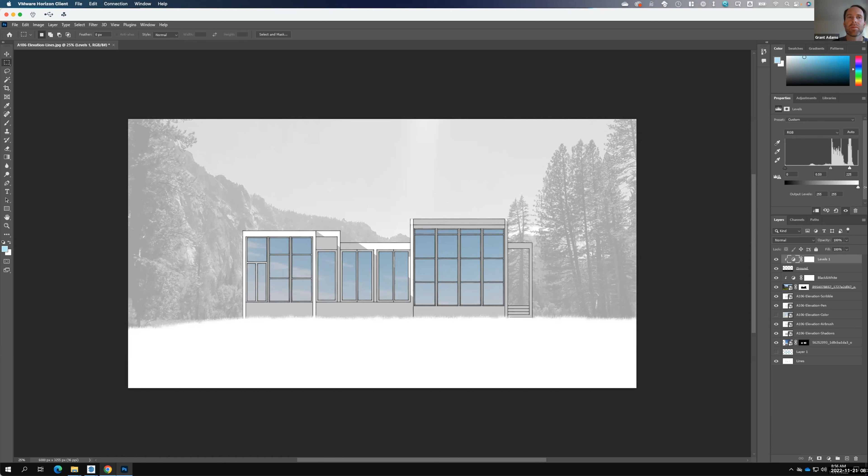I can change it to gray, or all the way to white. Maybe that looks like too much snow. Maybe I like it in black, but this is our example to actually play around with it and start to see what looks good and what doesn't. I think I'm going to leave it as black. I think it looks a little bit better there.

So I've gone through and I've done a background, I've done all the windows. Maybe I want to collage some materials onto this building. Well, I can do that. This was designed to be kind of a concrete building, so I could go ahead and collage some concrete in. I would need an image of concrete, so I'd come back here and look for concrete wall.

Ideally it would be a tiling texture. I could say, oh, I like this one, let's go ahead and get the image. There it is, and I could go ahead and download it like that. Then once again, I'm going to copy it and save it.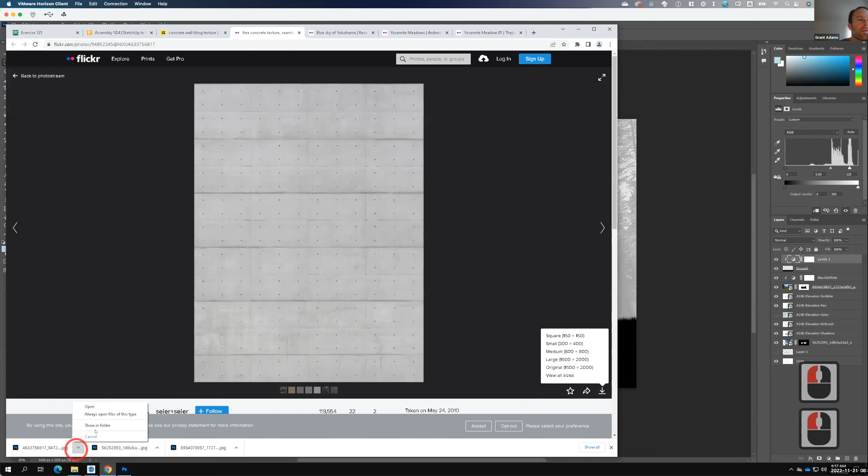Now it's important that each time I'm moving these onto my flash drive, because if I wasn't moving them onto my flash drive, we'd end up losing them long term. I want to make sure - sorry, I say flash drive, I mean my OneDrive. There it is, let's bring that one in.

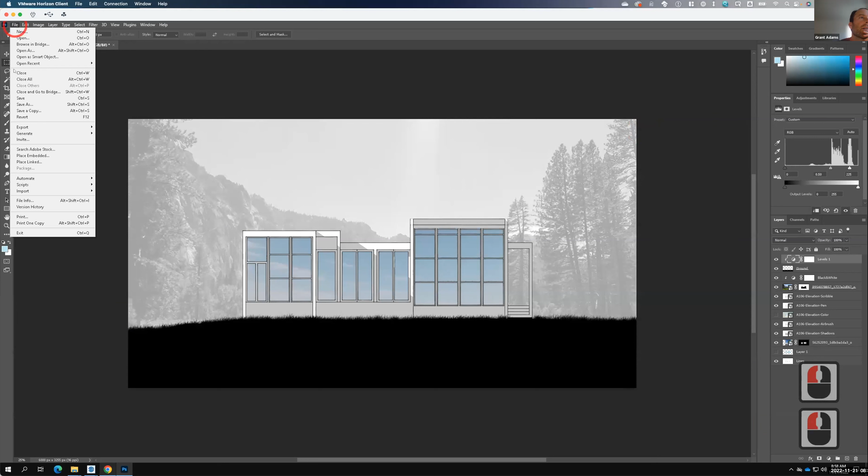So I'll go to File and then Place Embedded. There's my concrete, we could bring it in. This is obviously going to need to be smaller, so let's make it a little bit smaller here so it's big enough to cover my building. I like that, I'm going to commit to it, and then I'm going to copy it and paste it.

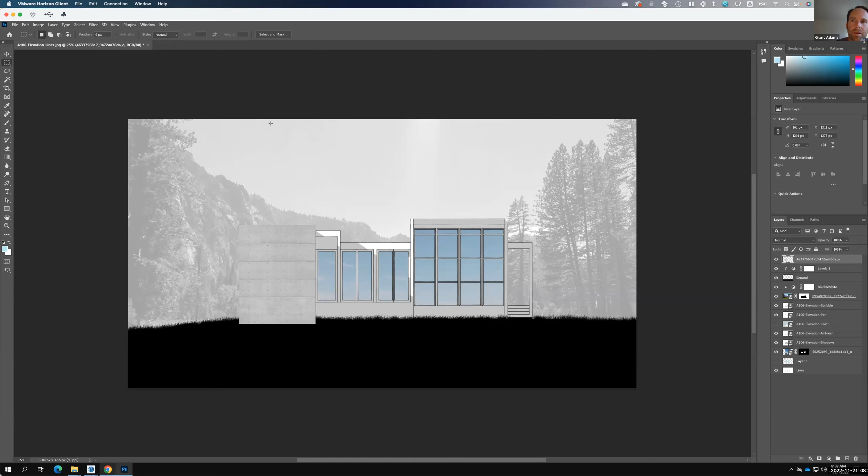First off, let's rasterize the layer. I'll right click and say rasterize layer. There it is, and that's just so that it's embedded fully. Then I can go ahead and copy it, Control C, and then Control V, and I'll get a second version of it. I could then move this so that those line up.

I'm going to use the arrow key to make sure that they're touching. Control V again, that gives me the next one. Control V again, that gives me the next one.

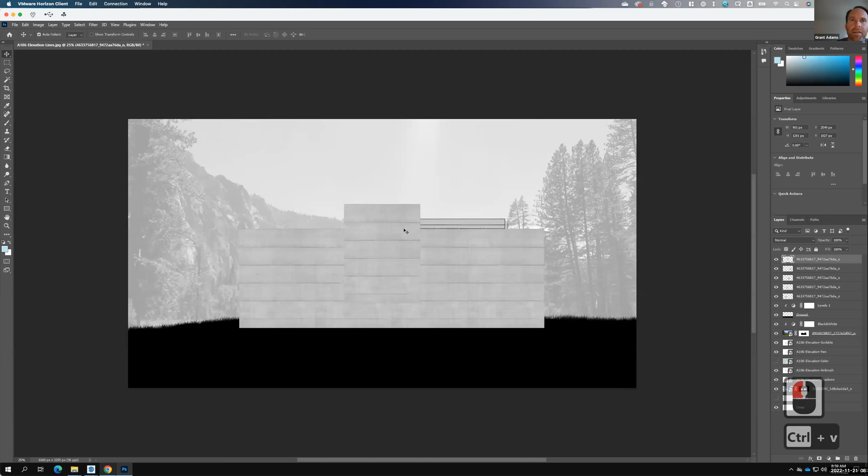It looks like I didn't quite cover my whole building, so let's see if we can't move that up to cover my whole building. Ah, it's a little bit small, so we'll have to just add one more piece right there, and then one more piece right there. Like that - so I've added that texture.

Now it's a matter of combining all of these layers. So there's all the concrete that I have. I've clicked on the first one, held down Shift, clicked on the last one, and then I'm going to go up to Layer, and go to Merge Layers, and it's going to merge those into one, and I could rename this to be concrete.

Then it's a matter of doing the same kind of masking. So let's turn everything off except for my lines, and look at where we want that concrete to appear. I'll use my magic wand tool - I think that's the easiest - and we'll select, oops, I need to be on the lines layer, sorry. We'll select the places where we want the concrete to appear. I'll hold down Shift, and we'll work our way through the parts of the building that should have the concrete on them.

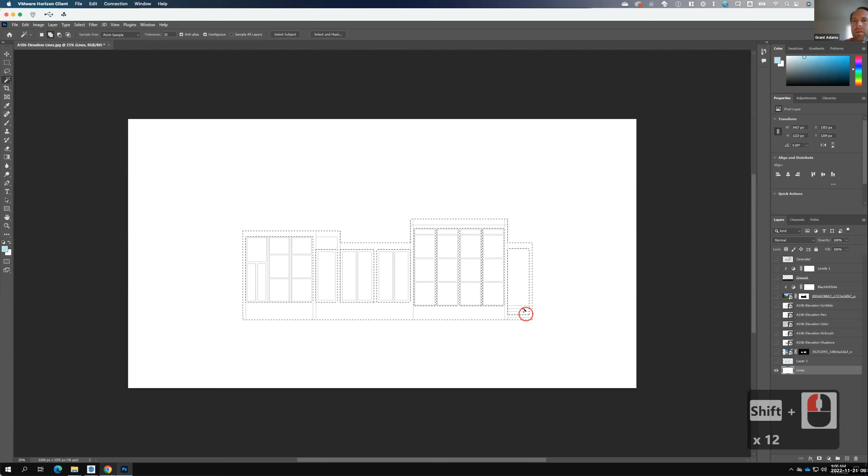Maybe like that. Once I have that, I can go up to the concrete layer, turn it on, and then click on Add Layer Mask. Now the concrete's been applied to that part of the layer as well. I'm actually going to move this down in the layer stack so that it's down here by the bottom, so that when I turn the rest of these on...

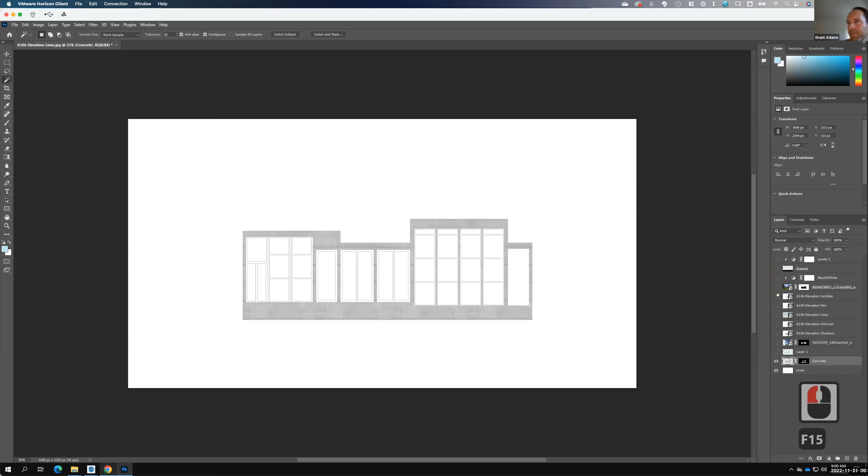Except for that one and the color, right? We can see it with the concrete in the background. And again, that's just another strategy. So maybe this is too much, maybe it's not enough, maybe the background needs to be a little bit lighter, but this is our goal - this is our ultimate goal, is that we're trying to create this collaged elevation view.

The last piece that I think is really, really important that a lot of times people forget in our elevation views is you need some kind of a person to represent scale. And that's where all those people that we cut out belong.

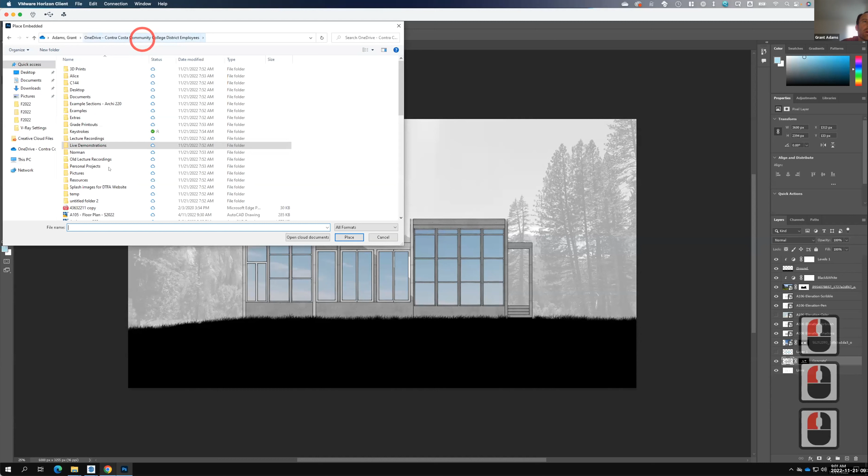So I'm going to go back and go to File and then Place Embedded, and I'm going to pick one of those people. Those are in my OneDrive. I have people, and it would be really nice to see previews of these, but of course, Windows isn't going to do that for me.

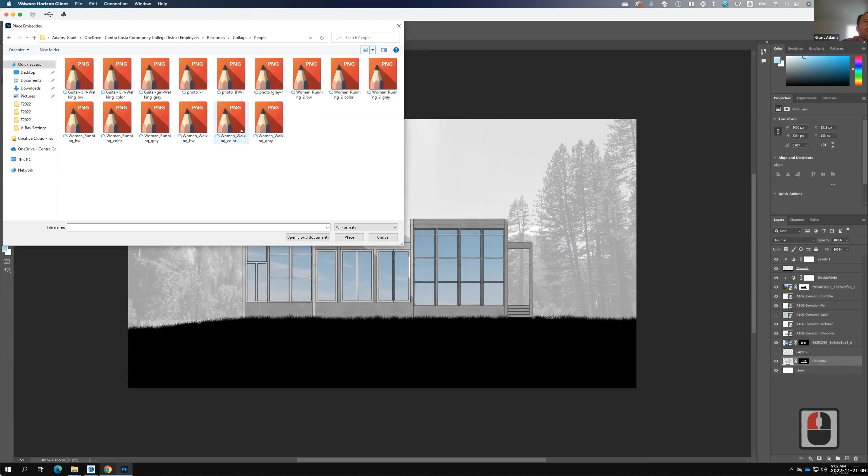I'm going to use this one. We'll see what happens, I don't know. So there's the person, I need to adjust her scale.

So we'll keep her in proportion, and we could place her right there. We need her feet to be at the right height. It's about there.

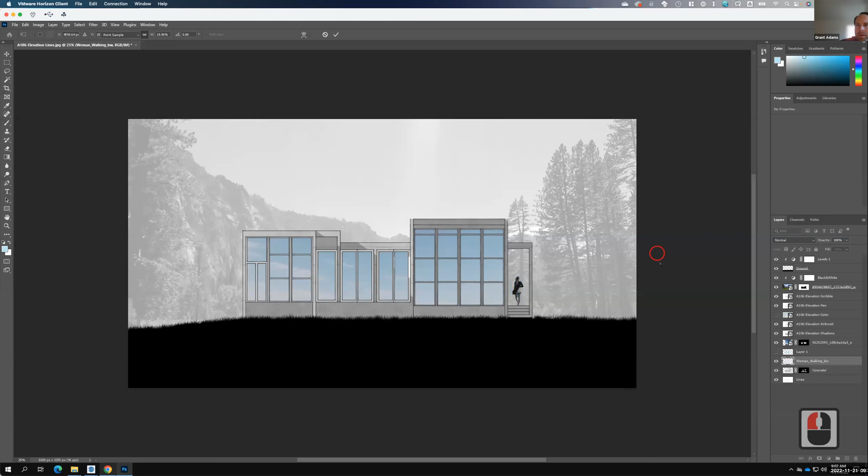And now you can see the person, and I chose to put her in black and white. The alternative would be to put her in as a silhouette. So I could do that going to File and then Place Embedded. And that was the gray right here, and we could drop that down.

So I'll just show you these as two options, because remember, it's always about looking at it. And on that person, let's put her up on top of everything. Get her up here. And then I want to add an adjustment layer on her to switch her to black.

So I'm going to go to my layer, new adjustment layer, and we're going to do a levels adjustment. There we go. And again, we're going to tie it to the woman walking gray layer. So I'm going to go to layer, create clipping mask, or Control-Alt-G on the keyboard. And then I can skew her to be black like that.

And so that silhouette then could replace, if I wanted to, the girl walking like that. And so this becomes a matter of style. Would you rather see the person like that? Or would you rather see this person, move it up on top, where she's an actual photograph? It just becomes a matter of style.

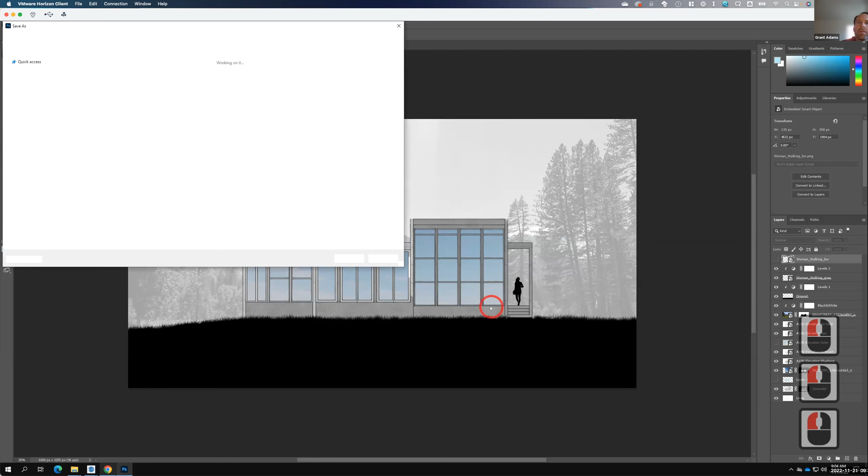Okay, so when I'm all done, first thing I want to do is save my Photoshop file. I'll go to File and then Save. And we'll make sure it goes into my folder for today here. I hope. Yep, and we'll call this my elevation. And then we'll go ahead and click on Save. That's the Photoshop file, so I can come back and make edits to it after the fact.

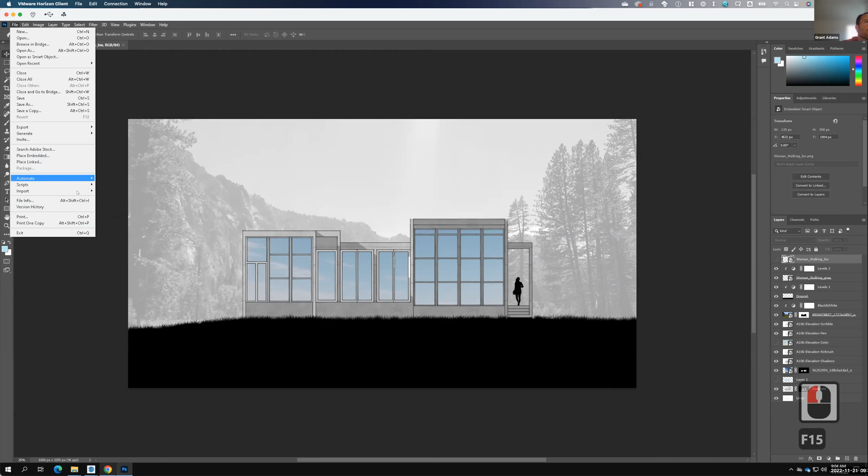There we go, and then I'll do an export. So I'm going to go to File and then Export. There it is, Export as. And we can do it as a JPEG, so we'll go ahead and jump to a JPEG.

For posting on Canvas, in the interest of size, we don't need it to be nearly this large, so we could drop it down maybe in half. We'll do it at 3,000. There we go. All the rest of these options are okay. Let's bump the quality up. There we go.

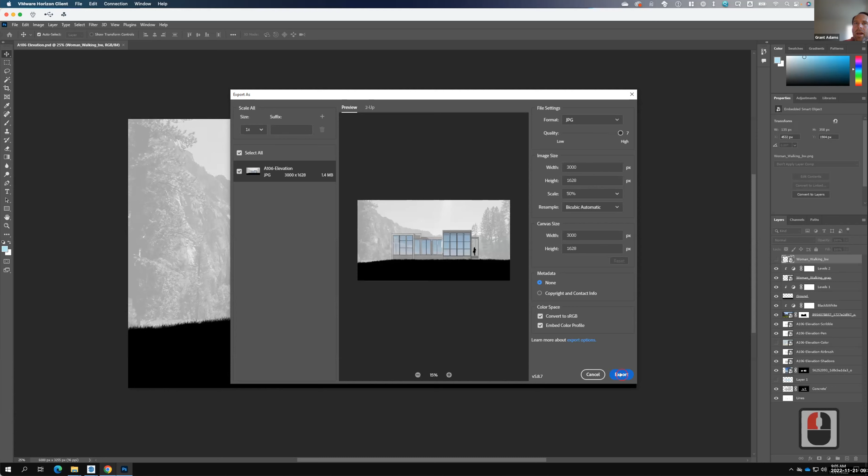And then we'll go ahead and click on Export, and we could do dash final. And then we can go ahead and click on Save. And that then writes our elevation view.

Okay, so this exercise is all about creating that elevation view. Remember, we're only doing one elevation view, so this is plenty, we don't need to do all 4 elevation views. And it's about creating a high quality output from SketchUp. How do we make something like this look really good from SketchUp? That's really what this is fundamentally about.